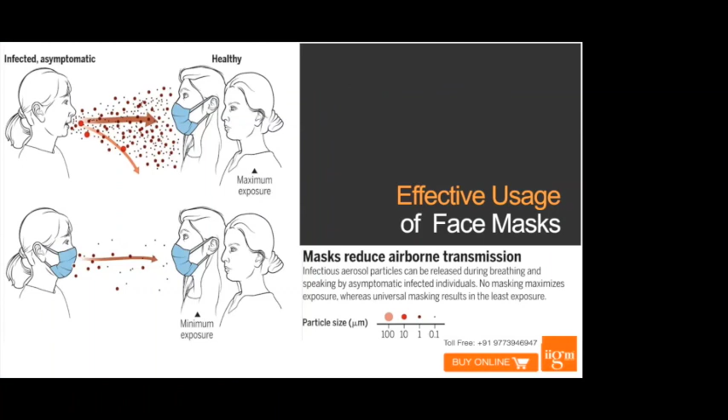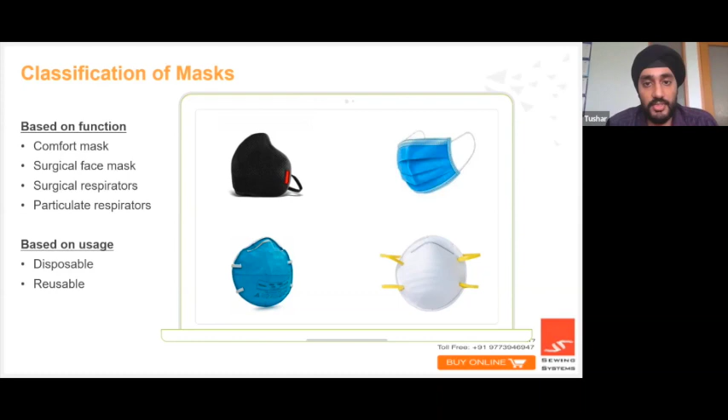Good evening, everybody. I'm Tushar Dodi, and I'm going to take you through the fabrics and trims for masks section. When it comes to fabrics and trims for masks, let's start with how we categorize them. We can divide them as per function, which is a comfort mask, a surgical face mask, a surgical respirator, or a particulate respirator, or based on usage, which is disposable or reusable.

So all the masks that you make today will be a combination of these fabrics. Today we will discuss the function of each fabric, where it is used and why. The fabrics are spun-bond, melt-blown, SSMMS, activated carbon, and hot air cotton. We have a short video that showcases how the first two fabrics are produced.

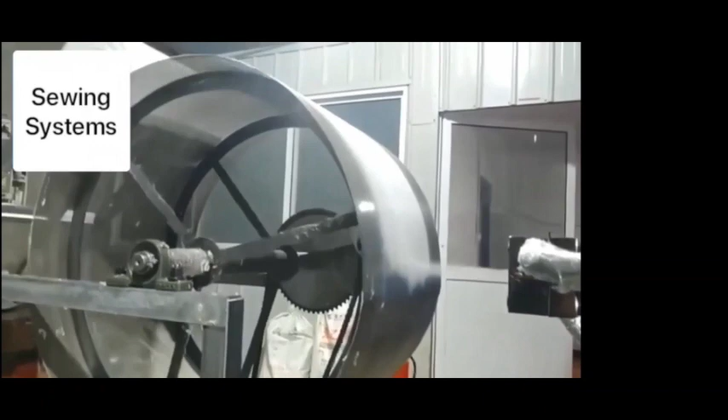PP granules are melted at very high temperatures and sprayed through a nozzle to form a continuous overlapping melt-blown fabric.

The spun-bond nonwovens are made by spinning continuous filament fibers onto a moving belt. The continuous fibers come from polypropylene material, which are dried, melted, and extruded into a flowing polymer melt. This is basically a standard production of the spun-bond process.

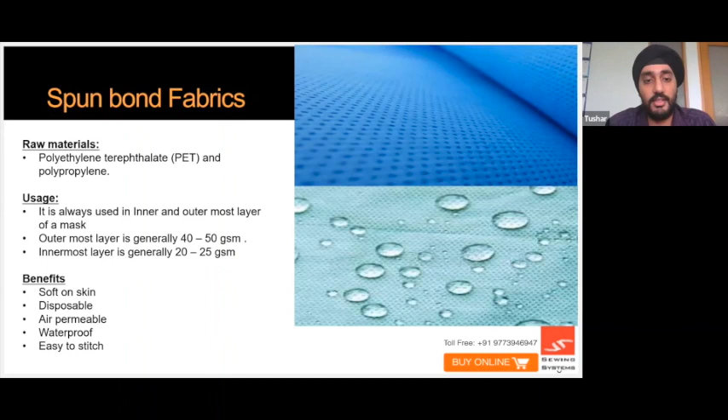Coming to the first fabric, spun-bond is the most used and widely available fabric. It is made from polypropylene granules and is used in N95 masks, where the outer layer is 50 GSM and the inner layer is 25 GSM. It's also used in surgical masks where the inner and outermost layers are 10 to 15 GSM. Benefits of this fabric: above 25 GSM, it is waterproof or hydrophobic, it is also air permeable with low breathing resistance, and it is disposable.

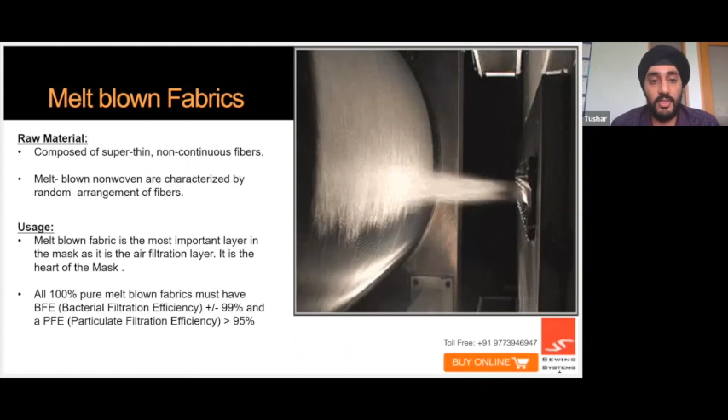Melt-blown fabrics are super thin, non-continuous fibers, made by melting PP granules under very high temperatures and then spraying it into sheet form. This makes the thin non-continuous fibers arrange themselves so they overlap each other to trap particles, while still leaving enough open space for air to pass through. This layer is the most important layer of a mask, as it is the filtration layer, and should be well padded and protected from both sides. All 100% melt-blown fabrics must have a bacterial filtration efficiency of at least 99%, plus or minus 1%, and a particulate filtration efficiency of at least 95% and above. Only then does it qualify to be used as a respirator.

SSMMS is made from a mix of spun-bond and melt-blown. It is used as a budget alternative for pure melt-blown. If you are making a comfort mask or a mask with shirt fabric or any other fabric you deem worthy, and you want the mask to have some filtration, you can use this SSMMS fabric without a very high additional cost. SSMMS fabric will give you a BFE of around 95%, which you can advertise in your mask. Its benefits are that it is soft, hydrophobic, and disposable.

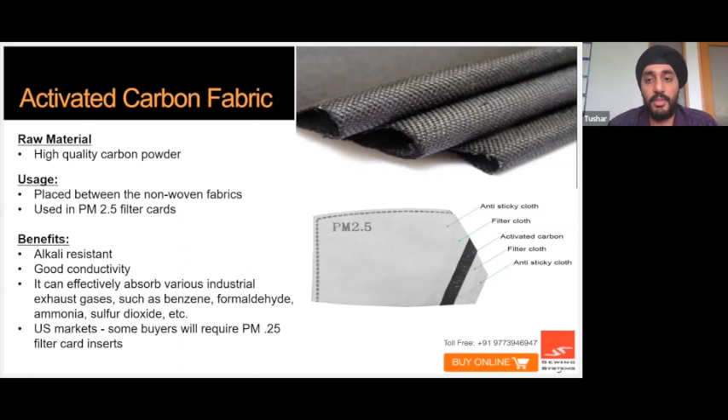Hot air cotton is made by using cotton and low melting polyester blended together by heat. It is used in a mask to provide padding, giving structure to the mask and stability to the fibers inside. It comes in a range of 50 to 90 GSM, with above 70 GSM generally recommended. It helps with dust particle filtration and also helps reduce breathing resistance by giving a gap between the spun bond and melt-blown layers.

Now that we are done with the fabrics, let us move on to the basic accessories used in a mask. The first one is the ear loop. It comes in knitted and nylon spandex. The nylon spandex is preferred for its stretchability and comfort, especially when wearing a mask for a long period of time. The knitted option is a low-cost option which is widely available.

The second accessory is a respirator valve. A respirator valve forces the air you inhale to be pulled through and filtered through the various layers in the mask, giving you the best efficiency. It also helps trap heat and vapor from exhaled breath and minimizes the risk of misting your eyewear. For sportswear brands and mask manufacturers targeting people who run or do fitness in a mask, a respirator valve is a must to provide high breathability.

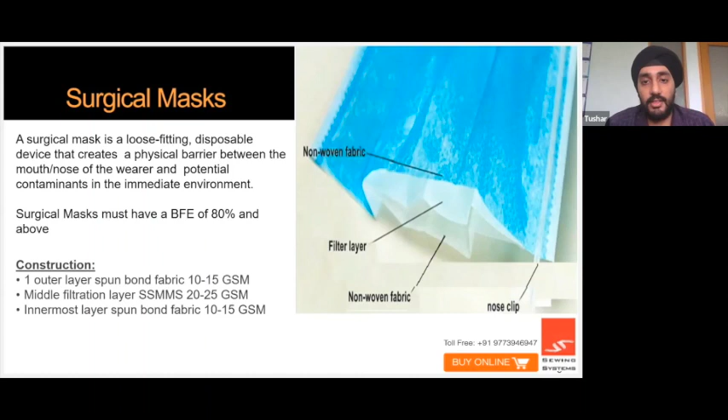Now we're going to look at and analyze two types of masks and their construction. The first is the surgical mask, the most widely available mass-produced mask in the market. Its function is to create a barrier between the nose and mouth and protect the user from potential contaminants. It needs to be pleated so it can unfold and cover the user's face. Surgical masks must have a BFE of at least 80% and above. The construction consists of a spun bond of 10 to 15 GSM on the outer and innermost layers, and a middle SSMMS layer of around 25 GSM.

The second type of mask we're going to look at is a particulate respirator, which deals with submicron particulate filtration. Amongst these, the most common and popularly known is the N95 mask. An N95 mask must remove at least 95% of airborne particles with a size of 0.3 micron. Its construction consists of an outer layer of spun bond of 40 to 50 GSM, a second layer of hot air cotton of 75 GSM, a third layer of melt-blown 100% fabric of 28 GSM, with around 2 layers generally used, a nose pin insert of either plastic or aluminum, and optionally a respirator valve.

There is also another standard for this respirator known as the KN95. KN95 has a few but key differences in terms of testing standard. The testing standard for the N95 is much higher than the KN95 standard. For an export order, you will usually recommend an N95 mask.

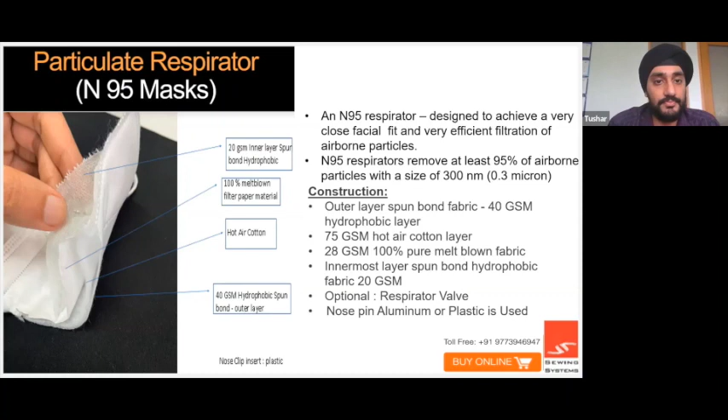After you have constructed your mask and finished using the combination of materials you've chosen, the mask as a whole can go through various testing standards to show what level of filtration it is achieving.

The first is the bacterial filtration efficiency, or BFE. Testing labs use Staphylococcus aureus as the challenge organism. The higher the BFE rating, the better the protection level. A BFE above 95% gives you a rating of type 1 surgical mask, and a BFE of 98% and above gives you a type 2 surgical mask rating, according to European standards. Currently, SITRA does the testing for BFE rating of a mask.

The second standard is breathing resistance, used to determine the airflow through the mask. The lower the breathing resistance, the higher the comfort level to the end user. This is where you must find a balance between filtration and breathability. More filtration generally means higher breathing resistance, and over-filtering with the wrong combination of fabrics will lead to higher breathing resistance, which causes discomfort to the end user.

The best way to test it yourself is to wear the mask for around 10 to 20 minutes and see if you find it easy to breathe, or if it's uncomfortable or suffocating. We have a short video that shows how bacterial filtration efficiency works. Next.

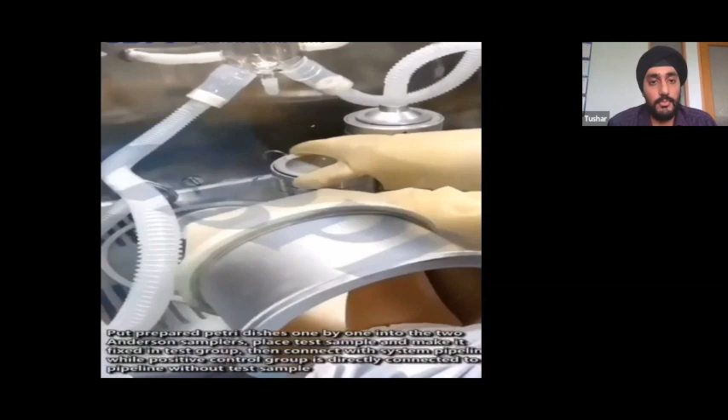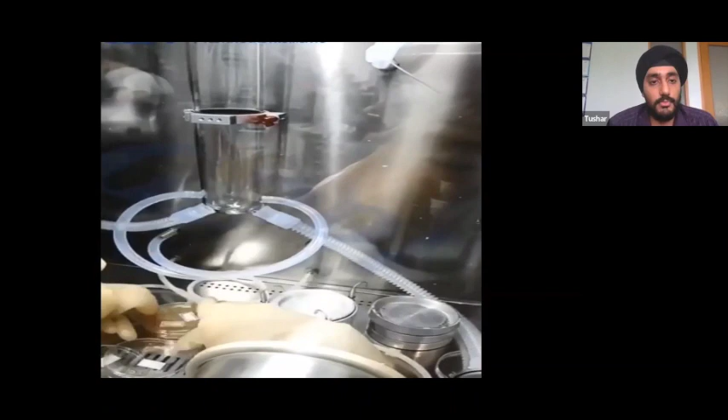In the testing of masks, one of the most important standards to check the quality of the mask is the bacterial filtration efficiency test. The mask is placed over a Petri dish, and under pressurized conditions, bacteria is force sprayed through the mask. The Petri dish is then taken and stored overnight. The next day, it is tested for the volume of bacteria, which gives the result of the efficiency and resistance of the mask material.

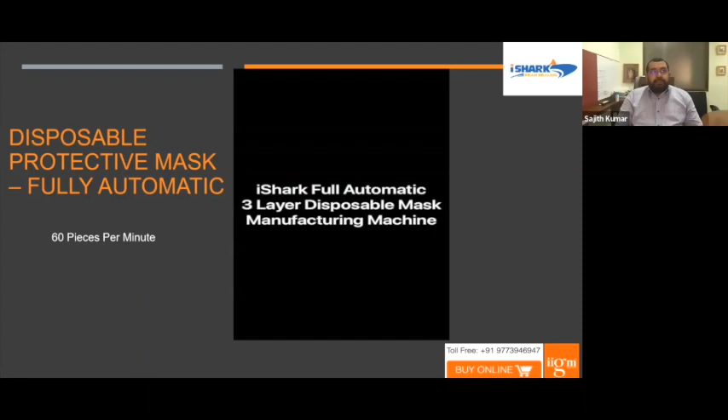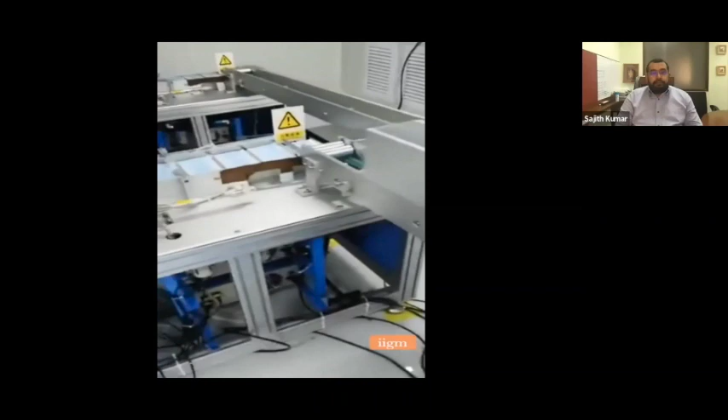Introducing iShark, a fully automatic 3-layer disposable mask manufacturing machine. The equipment consists of a mask frame making unit and 2 sets of fully automatic ultrasonic welding units for attaching the ear loop. The frame unit and the ultrasonic welding unit are integrated using a synchronized conveyor bridge. The overall productivity of this solution is 60 disposable masks per minute.

The second method is group automation, wherein one forming and cutting machine can feed up to 4 conveyorized ear loop ultrasonic welding units. The productivity of this solution can be configured to reach up to 120 pieces per minute.

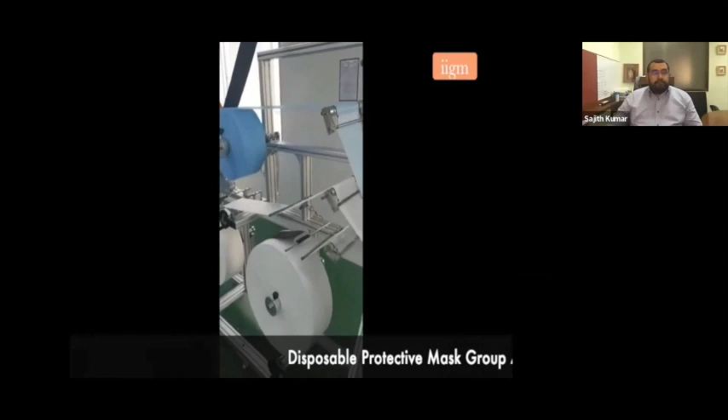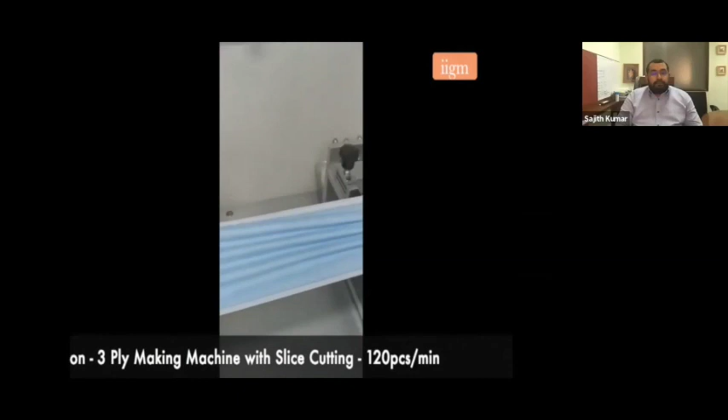iShark Group Automation Solution comprises an automatic mask frame making machine and a conveyorized automatic ear loop ultrasonic welding machine. The ear loop welding machine has an option of adding an automatic feeding unit which can eliminate the manpower required for feeding the mask frames. Each of the ear loop welding units has a production capacity of 30 to 35 pieces per minute.

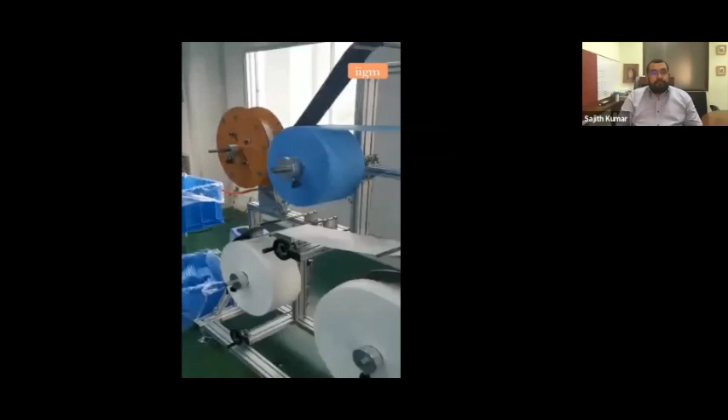For flexible manufacturing, 3-layer masks can also be produced with a combination of 1 forming and cutting machine and 6 semi-automatic or 8 manual ear loop welders for a limited production environment. Introducing iShark semi-automatic solution for 3-layer disposable protective mask.

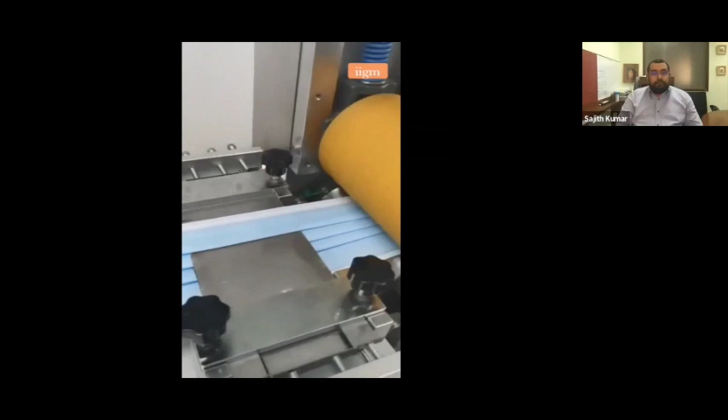The production capacity of this solution is 120 disposable masks per minute.

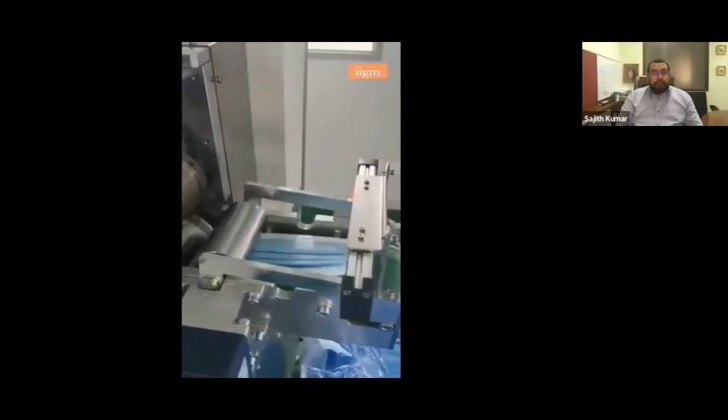Once the frame of the disposable mask is manufactured, the ear loop can be attached in 2 methods. The first method is by using the carousel type ultrasonic welding machine with a productivity of 20 pieces per minute. The second option is to use a manual ultrasonic welding machine to attach the ear loop.

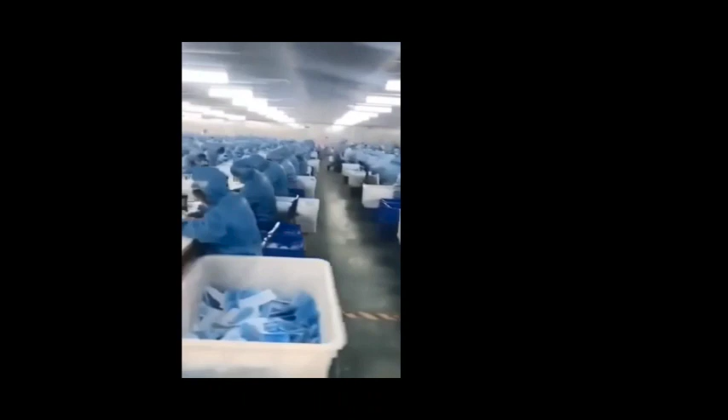We now introduce the high-speed forming and cutting unit called iShark DIY200, which can produce both kids and adult masks in the same equipment. The do-it-yourself equipment has a capacity of 200 pieces per minute.

Introducing iShark high-speed frame making and cutting unit, which can produce up to 200 pieces per minute. This unit has the flexibility of producing masks for children and adults alike. This unit can make 4 corner holes on the mask frame, which are used for manually self-inserting the silicone ear loops.

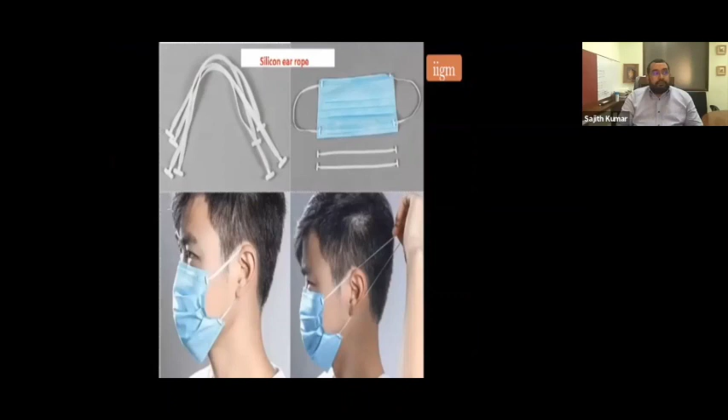We now move to higher grade masks which have better bacterial and particulate filtration efficiency. N95 folded masks can be produced in various options based on order quantities and options required.

A fully automatic machine line can produce 50 pieces per minute with nose bridge, nose sealing, and ear loop welding as standard.

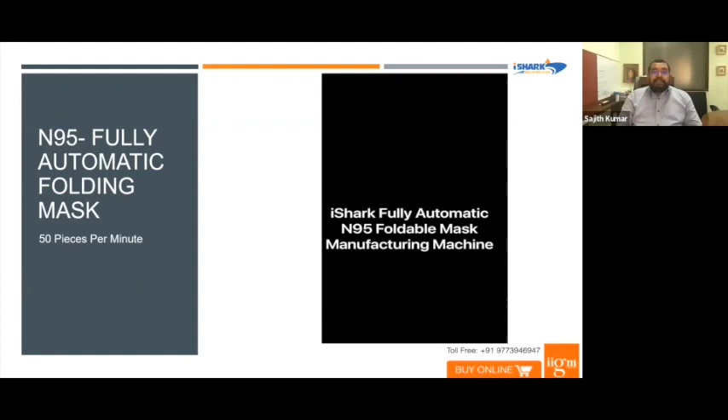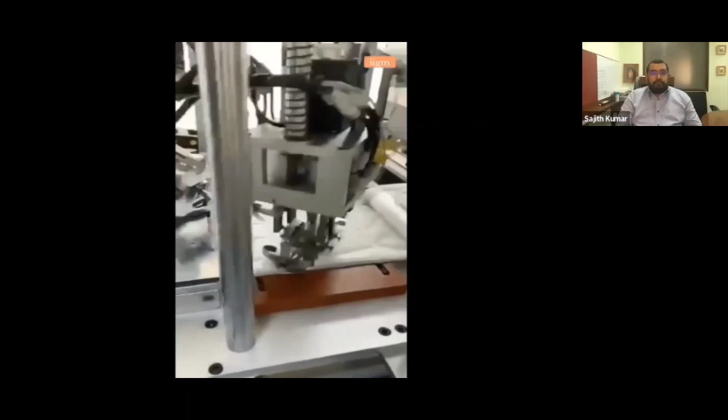Introducing iShark fully automatic foldable N95 mask making machine. The production capacity of this machine is 50 pieces per minute. The standard machine is equipped with a concealed nose bridge, nose sealing, ear loop ultrasonic welding, and slicing operations.

This equipment can be configured with online pad printing or offline inkjet or laser printing.

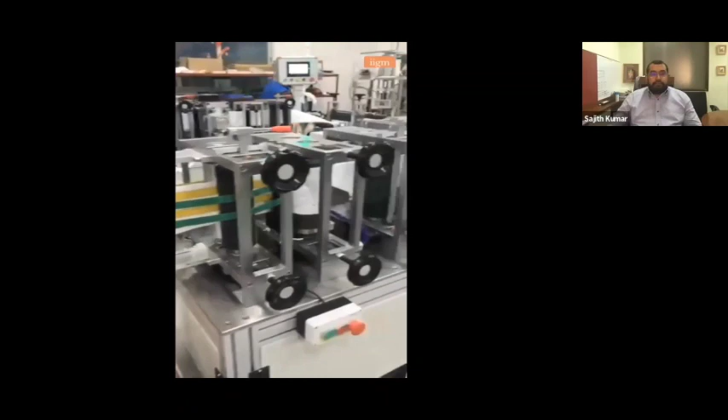This equipment can be configured with an automatic nose foam attaching device and an automatic breathing valve hole making device to attach the respirator on the N95 mask.

We will now explain group automation of N95 mask manufacturing. In this line, we will explain a group of 2 automatic lines. The first one is for mask body making with nose bridge, nose sealing, and slice cutting. The second automatic line is to attach the ear loop. The group throughput of 60 pieces per minute can be achieved using this solution.

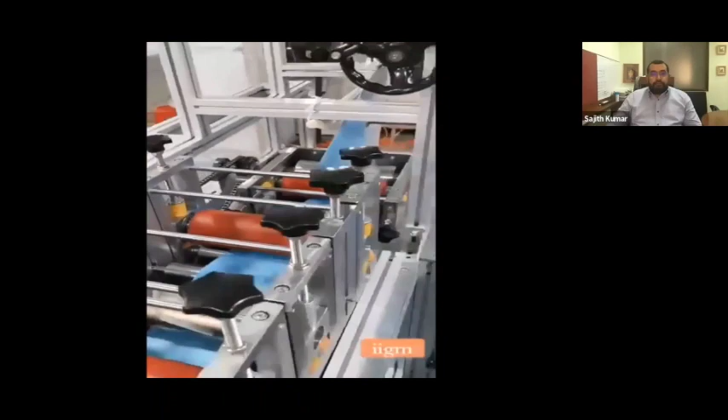Introducing iShark foldable N95 mask manufacturing group automation solution. The first part of this solution consists of a mask frame making automated line with concealed nose bridge, automatic nose sealing, and slice cutting operations. The second automatic line will attach the ear loop using ultrasonic welding machines for the N95 foldable mask.

N95 can also be produced in a flexible manufacturing concept with multiple options. Now we will introduce you to two efficient options. In the first option, we have a cutting and forming unit with nose bridge and slice. Ear loop welding, mask folding, and nose sealing is done using semi-automatic machines independently.

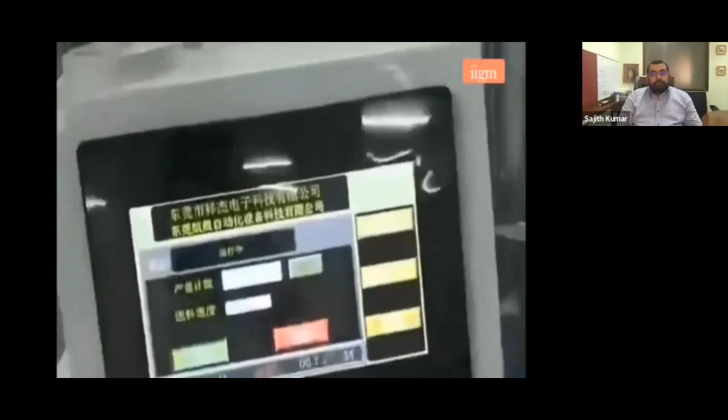Introducing iShark Foldable N95 Mask Manufacturing Semi-Automatic Solution option number 1. The mask frame machine includes automatic concealed nose bridge insertion and slice cutting operations. The ear loop attaching and mask folding operations are performed offline. The semi-automatic ear loop attaching has a production capacity of 20 pieces per minute.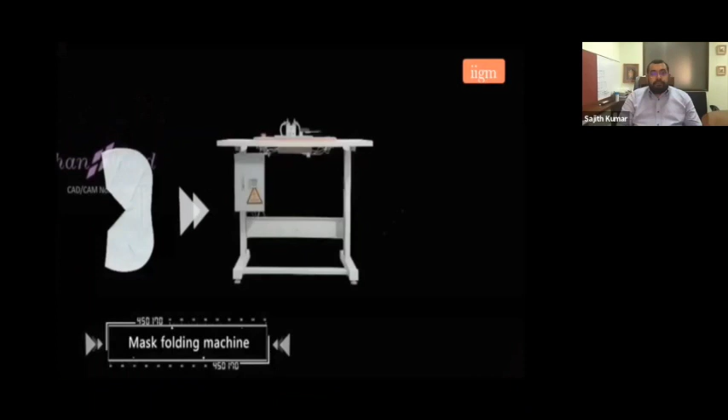The next operation is the mask folding machine. The folded mask is fed onto a rotating bed nose sealing machine. This machine has a manufacturing capacity of 26 pieces per minute.

In the second option, instead of using semi-automatic ear loop welding and nose sealing machines, we can use manual ear loop welding and manual nose sealing. Popularity of this solution is increasing due to less rejection in workflow and faster return on investment.

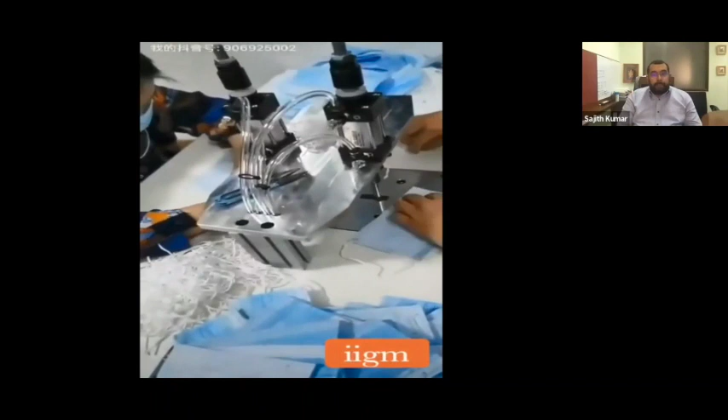Introducing iShark Foldable N95 Mask Manufacturing Semi-Automatic Solution option number 2. The ear loop attaching and mask folding operations are performed offline. The folded mask is fed onto an independent nose sealing machine.

Cup masks are used primarily in industrial environments for filtering dust particles. iShark can offer a semi-automatic workflow, which includes a cup forming unit. The forming unit uses 5 layers of non-woven fabric, consisting of spun-bond, acupuncture cotton, and melt-blown fabric. These fabrics are molded together in the form of a cup shape.

The second operation is slicing, which ensures perfect edges for wearing, and further the cup is sent to nose strip welding and ear loop welding independently. The same solution can be used for headband welding also. In semi-automatic workflow, we can produce approximately 10,000 pieces in a 10-hour shift.

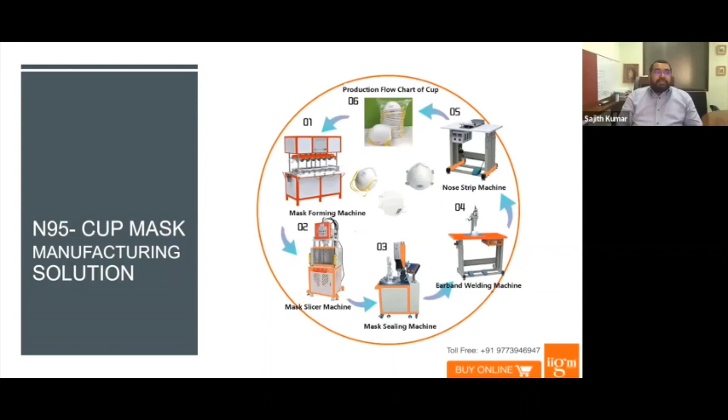Moving on to KF94, a Korean standard mask. This mask is also known as the fish mask. A fully automatic KF94 line has a production capacity of 50 pieces per minute. The KF94 or fish mask is the Korean standard mask. It is designed as a flat fold so as to provide comfort and more breathing space for the user.

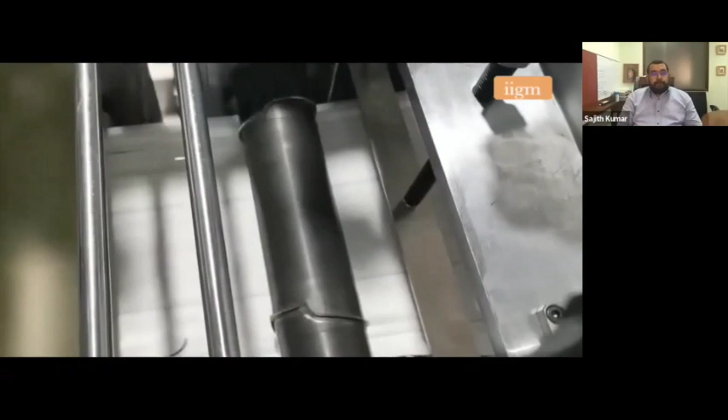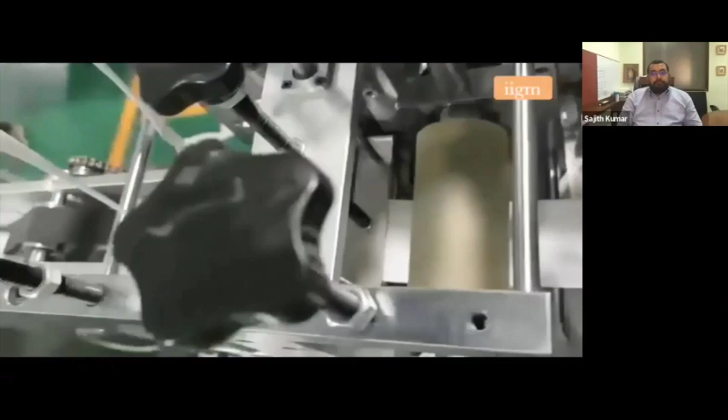The production line comprises of the main forming unit, and it has a synchronized conveyor system to feed the mask frame into an automatic ear loop ultrasonic welding unit. The production capacity of this equipment is 50 masks per minute.

In the case of disposable and N95 masks, there is a metal or PE2 wire strip concealed inside. It requires pressing the strip on both sides of the bridge of your nose. Another type of nose bridge is an all-metal aluminum strip. It can bend according to individual physical characteristics, making close contact with corresponding parts of the wearer's face and fitting the skin effectively to block dust particles, smoke, viruses, etc. Aluminum nose strip is fixed on N95 folding and cup masks using the iShark nose bridge welder.

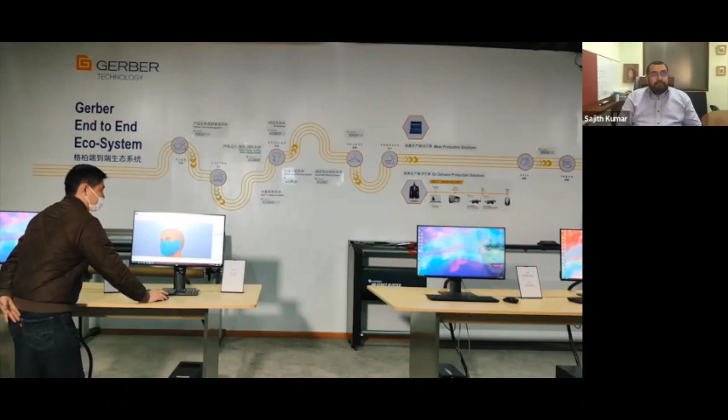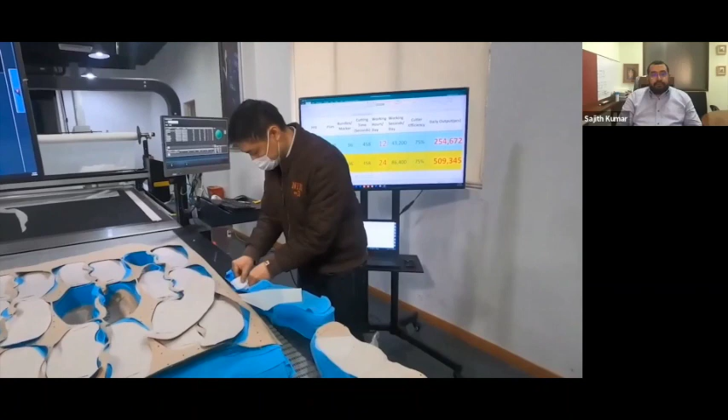Fabric mask patterns are designed using AccuMark 2D and verified for fit using AccuMark 3D. Gerber Spreader XLS series is used for spreading fabric and cut using Gerber cutter Paragon or G7. These cut pieces are ready to wear, and a filter insert is used for additional filtration. The configuration of Gerber CAD, Gerber Spreader and Gerber cutter can produce 250,000 pieces in 12 hours and 500,000 pieces in 24 hours.

Another option of manufacturing fabric masks is from Juki. Juki, a world leader in sewing machine solutions, helps our customers produce quality fabric masks with high-speed programmable single needle workstations or wide area pattern seamless sewing machines.

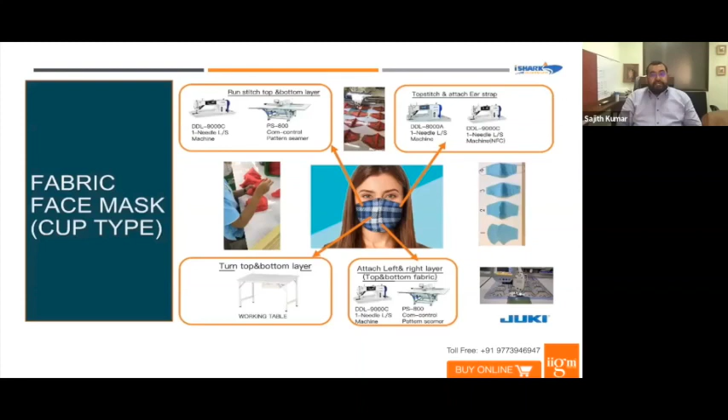Now we will take a look at the manufacturing of fabric reusable and washable cup masks. Juki is the world's leading industrial sewing machine manufacturer based out of Japan. In the process of manufacturing fabric masks, there are 4 main operations. The first operation is to attach the left and right panel of the mask using a Juki single needle lock stitch machine or a pattern seamer. The second operation is the run stitch for the top and bottom layer using single needle Juki lock stitch machines or once again a pattern seamer.

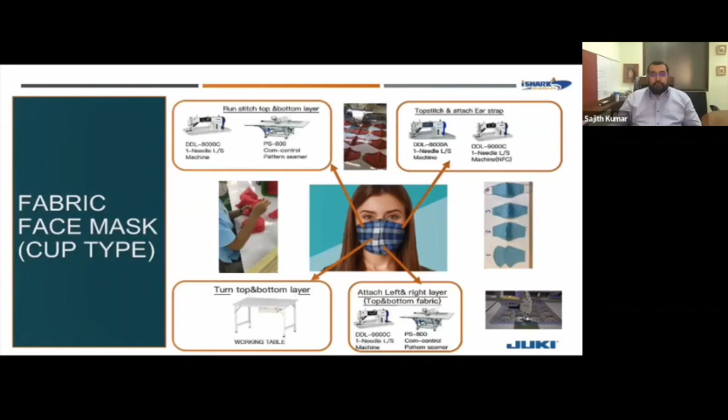The third operation is to turn the top and bottom layer of the mask. The fourth and final operation is to do the top stitch and attach the ear loop using a single needle lock stitch machine. In the manufacturing of 6-ply reusable masks, there are 4 major operations.

The first operation is joining the panel using Juki single needle lock stitch machines. The second operation is the dart and tipping operation, which can once again be done using Juki single needle lock stitch machines. The third step is the side serging operation of the mask using Juki 4-thread overlock machines. The final step is the edge binding and ear loop attaching operation using Juki single needle lock stitch machines with a binding folder.

N95 masks are required to be printed with compliance standards like FDA or CE and batch details. We have 2 options of printing: using food grade ink and with UV laser. Laser printing is used to avoid counterfeiting of masks. We also provide printing solutions on masks for value addition by printing multicolor logos on fabric masks. This video will further explain the various printing options we offer.

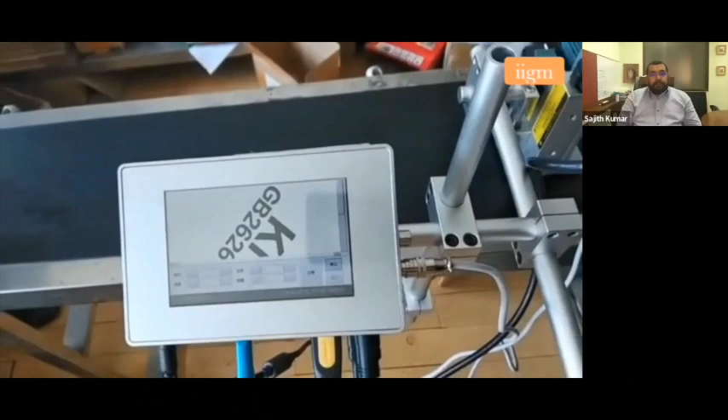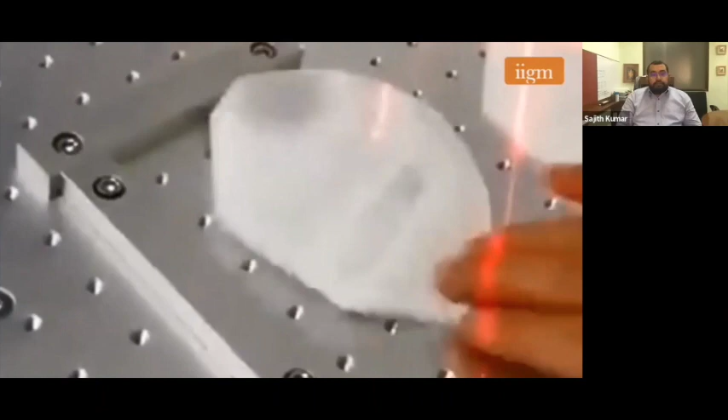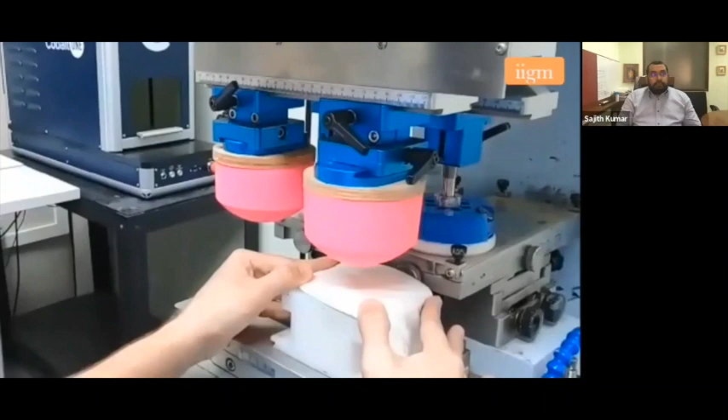iShark fully automatic inkjet marking machine is used for printing logos and labels onto the N95 mask. iShark UV laser marking machine is used for laser printing logos and other information onto the N95 mask. Inkcups' pad printing solution offers multicolored logo and other information printing for the N95 mask.

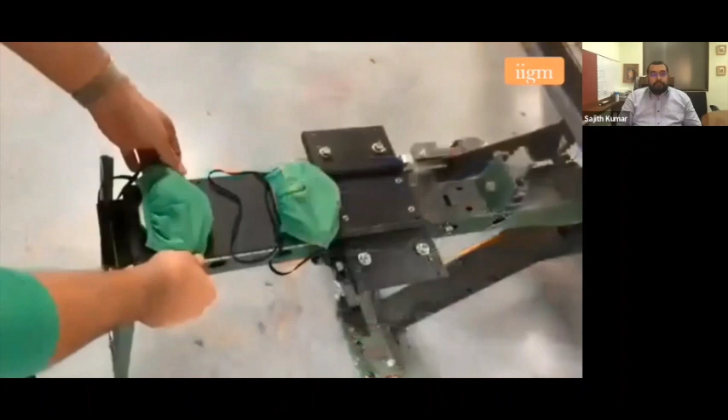Today I'll be showing you how to print face masks on our double mask pallet. Once you place your face masks on the pallets, you'll use the quick stretch to hold them down so they don't shift while printing.

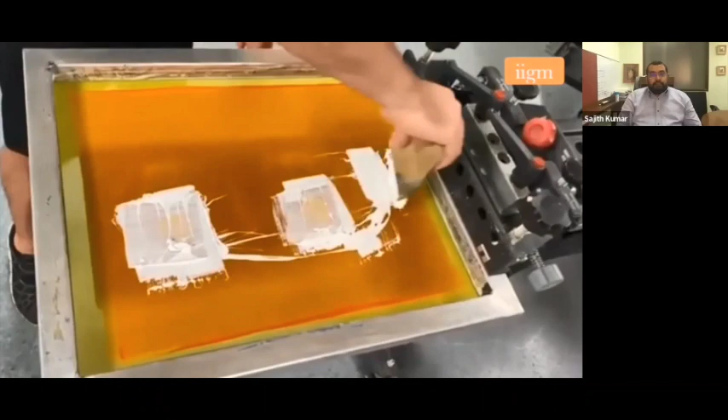Now you can go ahead and print your design. If you do need to flash your design because you're doing multiple colors and underbase, or you just want a brighter color, you can go ahead and do that without worrying about shifting because the quick stretch will hold it in place. And now your prints are done and you can throw them through the dryer. You can see you get nice crisp lines without any blurring.

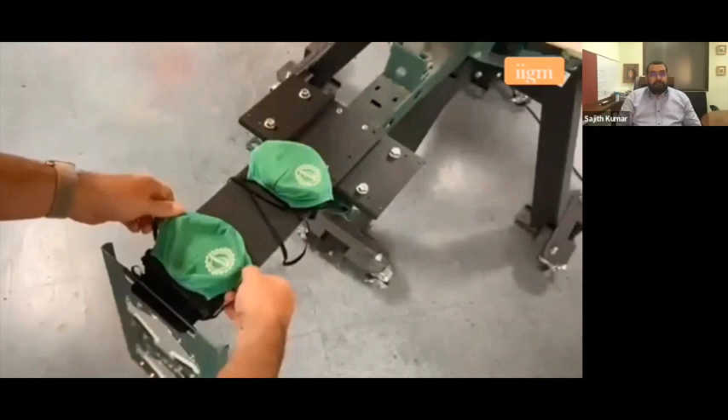Now all you have to do is pull the quick stretch off, put it on the built-in holder, and you can throw them in the dryer. And there we have a quick and easy print on our double face mask pallet.

The fixed high-intensity UV lights can kill bacteria, virus, and other pathogenic microorganisms within 2 meters. iShark ultraviolet sterilization stove and automatic packing machine for disposable or N95 masks can help in quickly disinfecting the mask before moving on to automatic packing process.

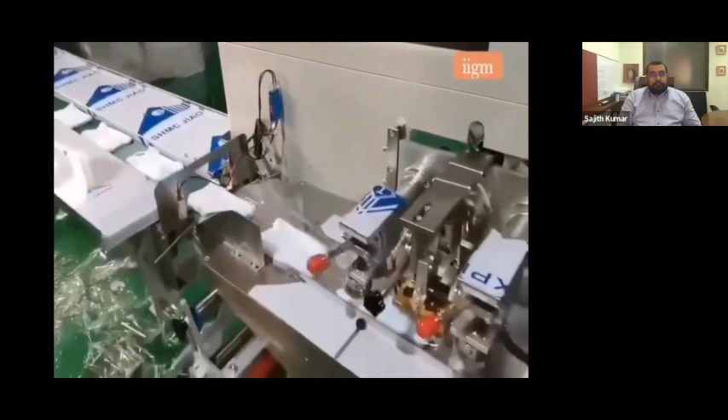iShark ultraviolet sterilization machine has a capacity to sanitize 60 masks per minute. After UV sterilization, iShark automatic packaging machine can streamline the packaging process to complete the product manufacturing cycle.

With this, we have completed the various mask manufacturing processes. Next, we'll pass on to Mr. Karsten Newbury, Digital Strategy Officer, Gerber Technology USA. Karsten will take us through the compliance requirements for the USA as well as the European market for masks. Thank you.

Yes, hi Sajith, thank you very much, very happy to be here. Let me just start out with a quick overview on Gerber Technology. I would expect and hope that many of you have worked with us, like IIGM. We've been in the industry for a long time, over 50 years in apparel, but also in the general flexible material space.

And even before the crisis of COVID-19, we've had many customers in the area of PPE, from basic protective suits, even for fire departments, all the way through customers like 3M or Honeywell making masks. You see some of the products there on the page that we support. In general, anything that's flexible material, not a hard good, something that our software, our cutting machines, and our overall solution can handle.

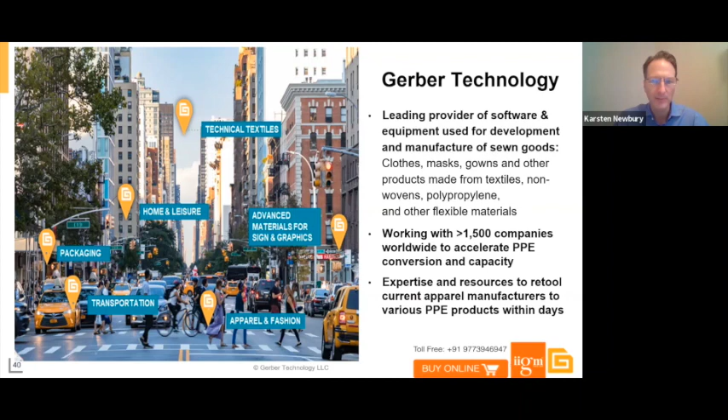So with that, let's talk a little bit more about the types of products. Of course, I think Sajith and Shara and others explained well the different categories. A lot of focus has been on the medical equipment, and this is important. You see the types of products that can be supported. On the medical side, you have the coveralls, the face masks, the goggles.

It's important that the face masks alone are a key component for protection, but they're not the only one. So having a bit of a portfolio of those products is very useful. Increasingly, we also see in markets around the world, as economies are opening back up, especially on the retail side, consumer masks being very important. The distinction was made before, these are mainly to not so much even protect the wearer, but to protect others from spreading the virus. Oftentimes these masks are called sneeze guards, to protect from sneezing and other particle transmission.

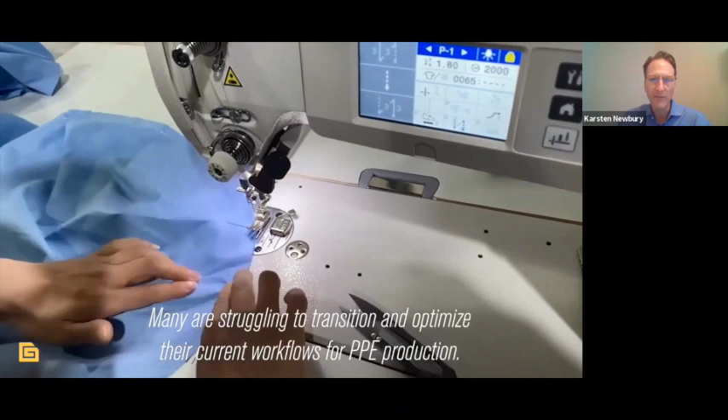So if we want to take a brief look at the next video, basically what you can see is that there is really this increased demand for PPE. The World Health Organization estimates that the need for masks is very, very high now. Every month they expect 89 million medical masks to be used. And that doesn't even include all of the civil masks that are being needed. The manufacturing demand, as was pointed out before, also increases dramatically as a result.

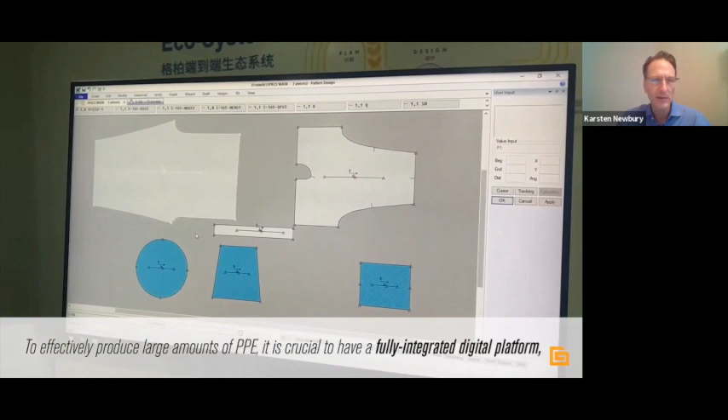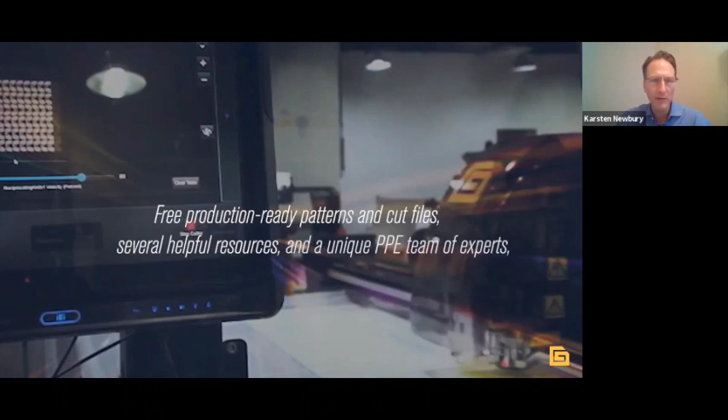Here you see an example of mask cutting on the equipment. We provide all the pattern files for masks, and also other products. You can also cut 3-layer masks, or if you put multiple layers of different materials together, that's possible too. There are quite a few masks or products you can make on the equipment. If you have cutting machines, this is a good way to leverage that investment and repurpose it for production. Not as specialized as the other equipment, but important to utilize the resources you may already have.

Let's move to the next one.

Some key questions as you work on your journey to move to PPE production. I'll go through this briefly, then talk about regulations and what needs to be met if you're interested in exporting, especially to the US or other countries. It's important to decide which PPE products you want to produce. In some cases it's best to start simple and work your way to more complicated products. The focus here is on how you repurpose equipment you have, or get into flexible production, not necessarily a specialized machine, but one that can make masks today and gowns tomorrow. Gowns are one of the areas also needed in the millions every month.

Once you've looked at what product you want to make, one of the other very important things is the fabric. If you don't have the right raw material, it's a big challenge. India is fortunate to have a lot of local raw material, but securing the melt blown and other materials you need for production is a key step before you really get into production.

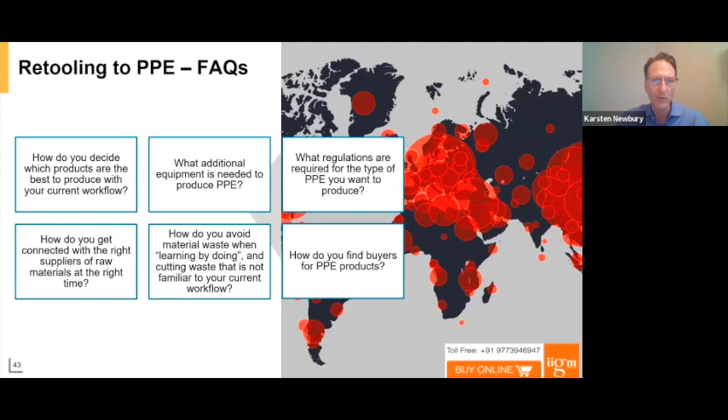Things you will find there are patterns, 2D CAD patterns, tech packs, optimized marker files - a lot of things already prepared that you would otherwise have to develop yourself. We also have links to raw material partners globally in case you cannot access the ones in your region, plus important information on regulations and industry organizations. We also have a matchmaking database that allows you to connect with other people looking for products like masks, or even production capacity, trim, or raw materials.

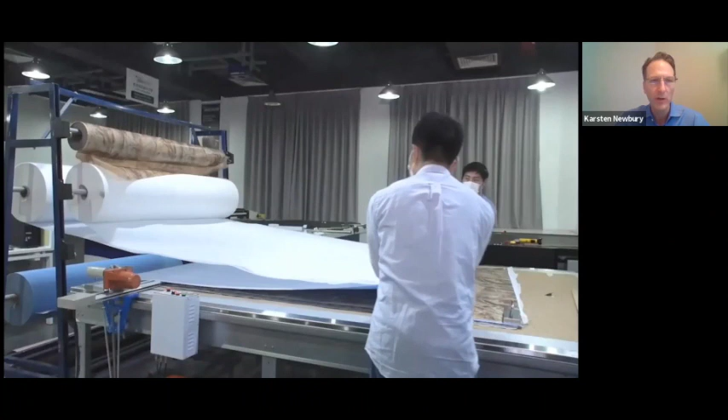Then the cutter will output the pattern files and cut the product. You can make tens and hundreds of thousands of masks per day depending on the type and layers used, so quite high volume. In most cases you'll need sewing or other methods to assemble the masks, but this gives you a good option if you have that equipment.

Or if you want to keep the flexibility for what type of PPE product to make going forward, or even branch back into apparel when demand for PPE subsides or other demand increases, it gives you a lot more flexibility. So this is an example for gowns.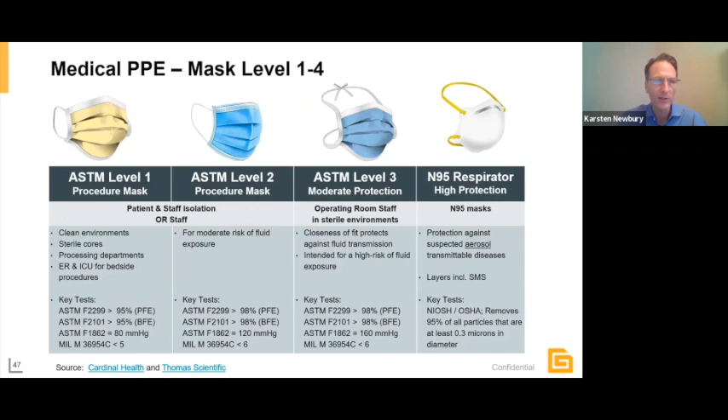This is important. We see many countries buying a lot of masks and materials, but in the end, you will still be competing with the lower costs from places like China.

So for the civilian use, this is also important. As I mentioned, there is a pretty high demand in this area. If you think of retail opening back up, fast food chains, McDonald's, others that are serving people, even if it's for takeout, they will want to be protected. On airlines, you see flight attendants wearing more and more gear.

One product category I didn't show here, but that's also quite important that you can make, is a different kind of mask - the face shield. Typically made from PET, but also very easy to cut on the Gerber machines. You saw it on one of the earlier pictures - a lot of the medical, but also other frontline workers do like to have the face shield with an extra layer of protection in addition to the mask. It does protect you more from spit and other particles hitting the face.

For the civilian masks, it's important that in the US, for example, you don't face any regulations yet. These are also made from usually regular fabric, cotton, denim, and we see a big trend towards fashionable masks where people are starting to match their regular clothing with some of the masks. If you go into Europe, the important thing is that here you will start seeing emerging regulations for civil masks as well. So it's important to inform yourself beforehand if you want to export civil use masks, regular masks, into Europe.

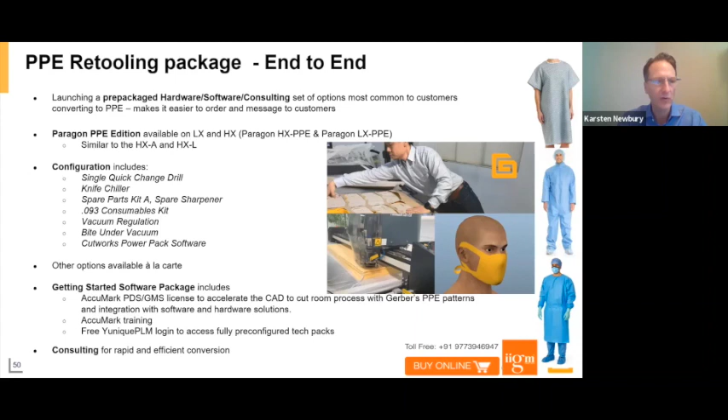One of the important things when we talk to brands that have been the historical buyers from the manufacturing side is that they're all revisiting their supply chain. They're looking strategically at who to purchase from. We're in contact with large brands like Nike, Under Armour, and others, and those leading brands are also helping their suppliers get into PPE production together with Gerber.

One of the important things to keep in mind is, as Winston Churchill said, never waste a good crisis. This crisis and the PPE production are really an opportunity to further digitize your offer. Coming out of the crisis, it's clear that a more digital supply chain will be critical for the brands and for the future of our fashion industry.

As you go through the PPE crisis, it's an opportunity not just to produce the PPE, but to set up your entire processes digitally - from managing your tech packs and PLM, to pattern making integrated with PLM and 3D simulation, and then integrating that digital development into production. This is the only way that the process will be much faster, that virtual prototyping will be possible with the brands, and you can shorten the response time.

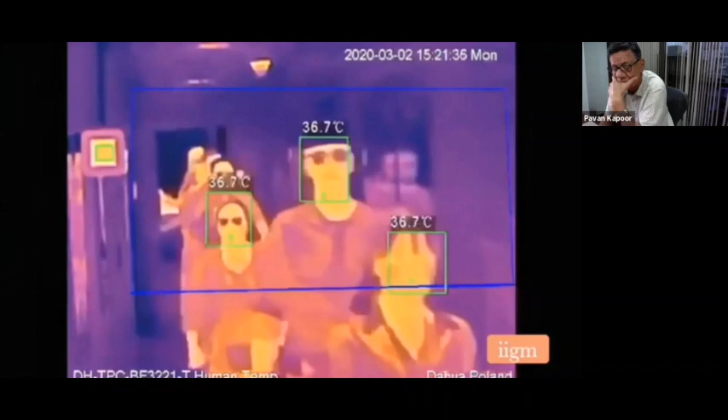This system delivers high-efficiency results up to 0.3 degrees centigrade for a distance up to 5 meters and for a group of up to 30 people. The system gives an automatic alert during an abnormal temperature reading, saving a lot of manpower and reducing the risk of cross-infection. Our solution cannot be manipulated even if someone wears a mask, goggles, and a hat.

The system is intelligent enough to give accurate results by focusing on the eyes and the forehead. The system works using artificial intelligence, and even if someone is wearing a helmet, the software is capable of recognizing the individual using his retina, and it can update the database.

The iShark Thermal Imaging Solution is tested and approved as per ASTM, the American Society for Testing and Materials. This certification differentiates us from the rest of the products in the market.

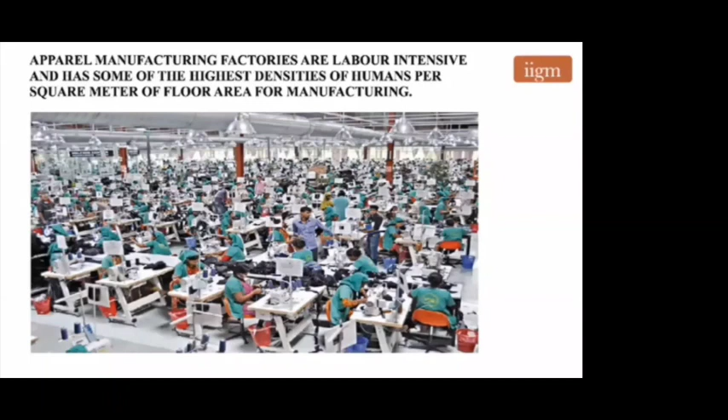Apparel manufacturing factories are labor-intensive and have some of the highest densities of humans per square meter of floor area for any manufacturing industry. Employees wearing masks at all times reduces the microdroplets in the factory atmosphere. The risk of infection through microdroplets becomes even greater in a closed space with poor ventilation.

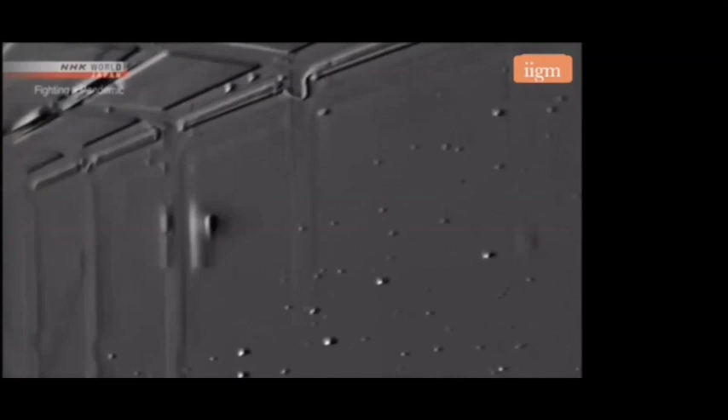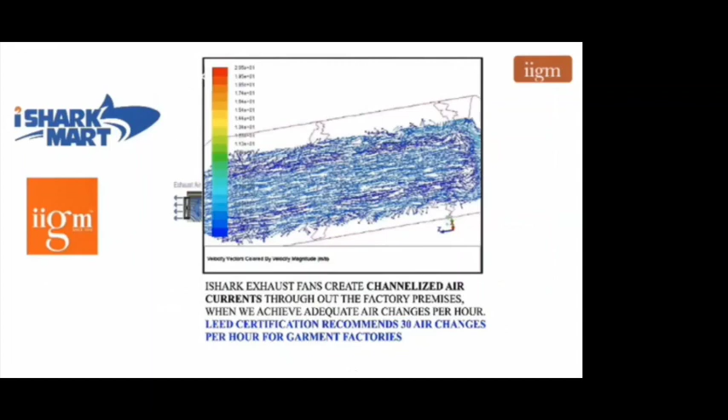Creating more air changes through forced ventilation and increased air circulation significantly reduces the risk of spreading COVID-19 virus and other bacterial respiratory infections. iShark industrial exhaust fans have a very low electrical power consumption of 600 watts for 32,000 CFM. Greenhouse gases produced in the factory such as carbon dioxide, carbon monoxide, nitrogen dioxide, and sulfur dioxide are removed from the factory atmosphere, resulting in higher attentivity and productivity of labor over longer periods of time.

Introducing iShark UV Disinfectant AGV, equipped with ozone and ultraviolet lamps which are used for sterilization, killing up to 99.9% of bacteria and all viruses.

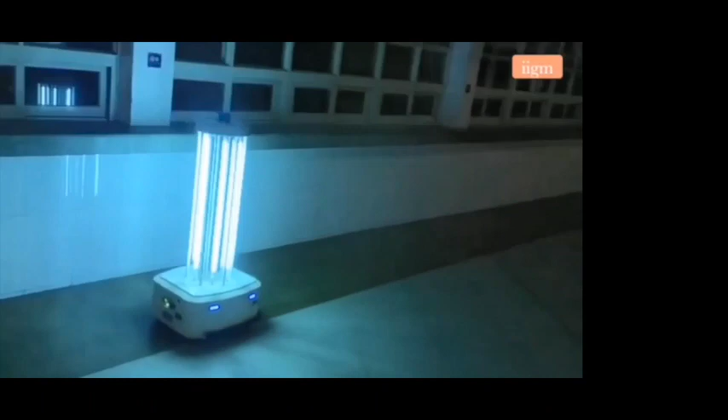This equipment utilizes artificial intelligence programming to navigate around factories and premises using lasers and cameras. The disinfection route can also be tracked and controlled remotely.

Tonello is the globally recognized professional washing and dyeing machine manufacturer from Italy. Tonello has developed a new machine called Sanicare Ozone Disinfectant Cabinet.

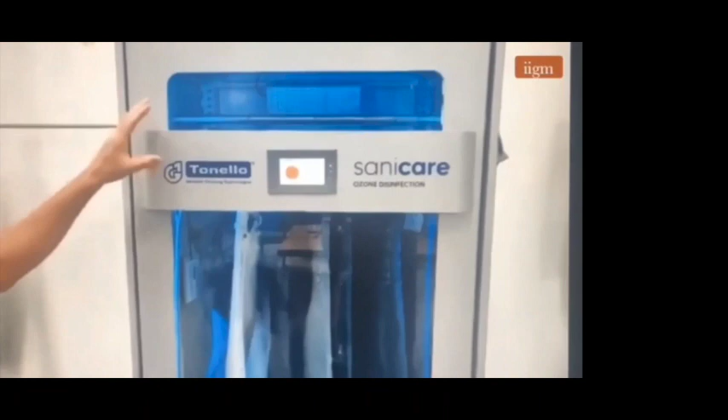This disinfectant static cabinet is available in 3 variants and can be used at showrooms, malls, hospitals, hotels, offices, and boutiques. This equipment is used to disinfect the garments, footwear, accessories, and protective devices.

This equipment can also be utilized to sanitize the showroom and the apparels displayed in it after working hours. The process time to sanitize 50 square meters of showroom space approximately will take 20 minutes.

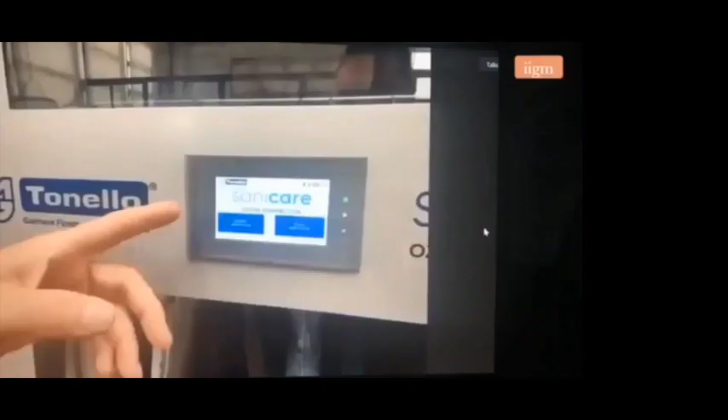The loading capacity of the cabinets in the smallest variant is 5 to 10 garments, shoes and accessories, and in the medium cabinet it is 15 to 20 garments, and in the largest variant 30 to 40 garments can be loaded at one time.

Introducing the global leader in skylight technology, Kingspan Skylights from the United States of America. The main objective of skylights is to bring in natural diffused light without the heat from the sun.

The conventional acrylic sheets used for skylights bring in spotlight along with a lot of heat. We made an experiment to demonstrate the comparison between Kingspan Skylights and the conventional acrylic sheets.

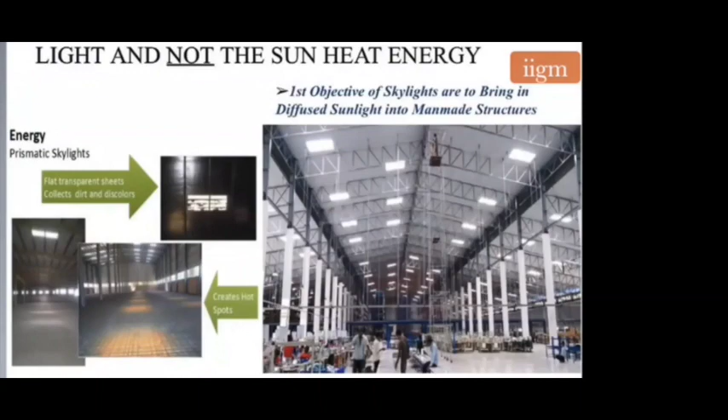We used a simple temperature gun. As you can see, the ambient temperature of this factory was 32 degrees centigrade. Then we pointed the temperature gun to the skylight installation. The measured temperature was again 32 degrees centigrade.

We did the same exercise by pointing the temperature gun at the acrylic sheets. The observed temperature was 42 degrees centigrade, which was a good 10 degrees higher than the ambient temperature.

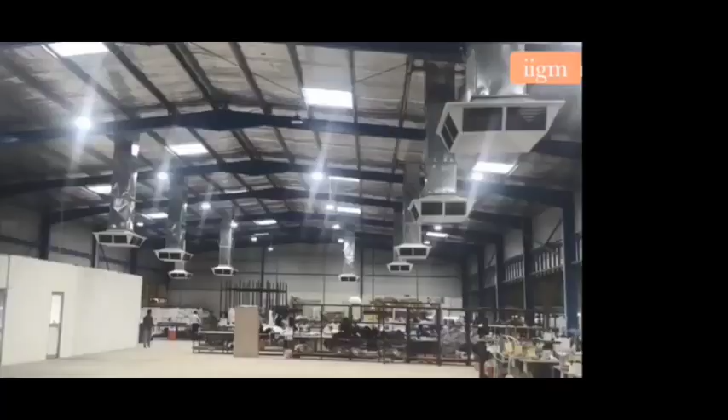These are a few images of our installations completed within India. The skylights can be integrated with the LEDs using economical light sensors, resulting in touchless lighting automation for factories.